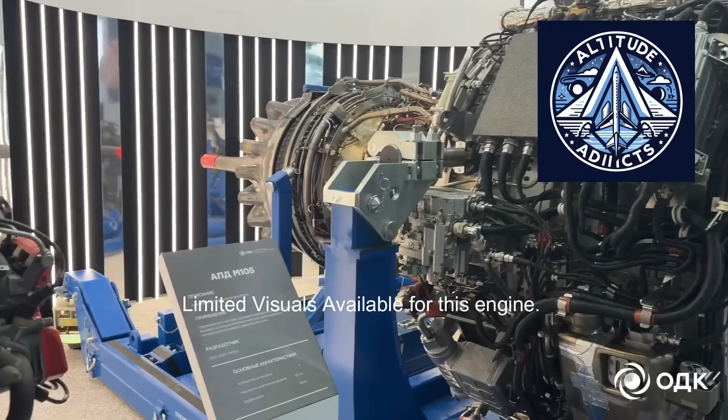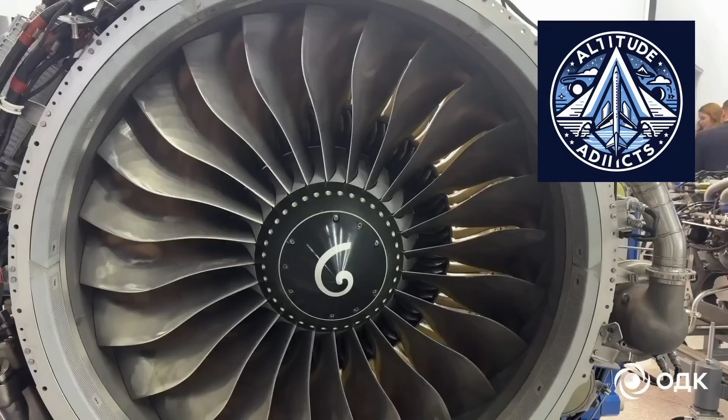The Russian engine building sector introduced a new piston aircraft engine in early 2026 that was specifically designed for light aviation. The APD M105 and M105V is rated at 115 horsepower, offers a declared service life of 2,000 flight hours, and weighs just 75 kilograms. On paper, this combination of modern power output, unusually high time between overhauls, and very low weight directly addresses operational challenges that Russian small aircraft designers have faced for years.

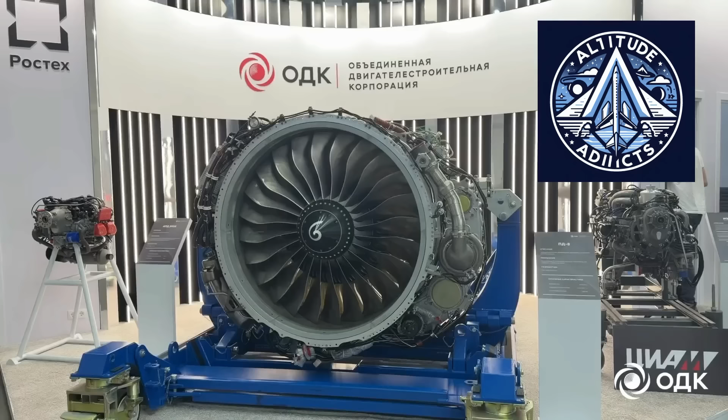As Altitude Addicts explains, the importance of M105 and M105V extends far beyond technical specifications because it enters a domestic market that has historically depended on imported piston engines. Until recently, Russia struggled to produce a competitive, mass-manufactured indigenous power plant for light aviation. This makes the new engine not only a technological breakthrough, but also a strategic commercial milestone. Altitude Addicts notes that it signals a renewed effort to rebuild domestic expertise in piston aircraft engines, an area that gradually lagged behind global competitors after the Soviet era.

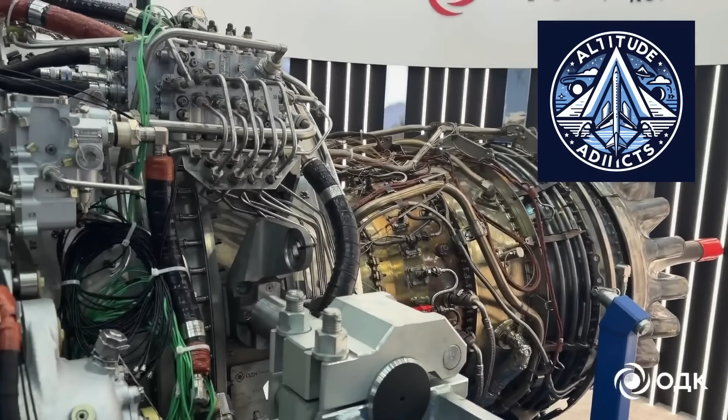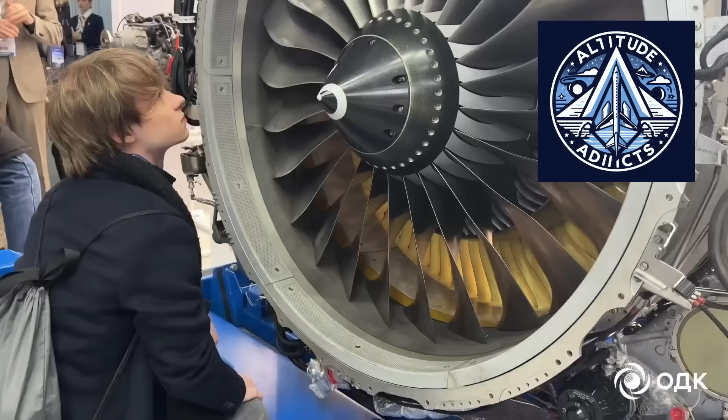To understand why this development matters, it is necessary to examine the long-standing reliance on foreign propulsion systems. For more than 30 years, foreign-made piston engines have dominated Russia's light aircraft segment, including training airplanes, ultralights, amphibians, gyrocopters, and certain unmanned platforms. Austrian Rotax engines became especially popular due to fuel efficiency, strong power-to-weight ratios, and proven reliability. Meanwhile, American engines produced by Continental and Lycoming were frequently used when older certified aircraft underwent remotorization.

This dependence created a structural vulnerability within the domestic aviation ecosystem. Spare parts availability, certification pathways, aircraft production timelines, and long-term maintenance planning were all closely tied to external suppliers. As geopolitical tensions increased and supply chains became less predictable, the risks of relying on imported propulsion systems grew more visible. Altitude Addicts has repeatedly highlighted the absence of a modern, scalable piston engine suitable for widespread light aviation use.

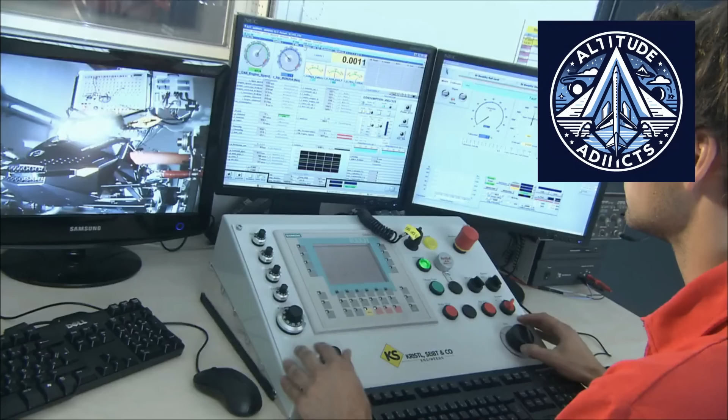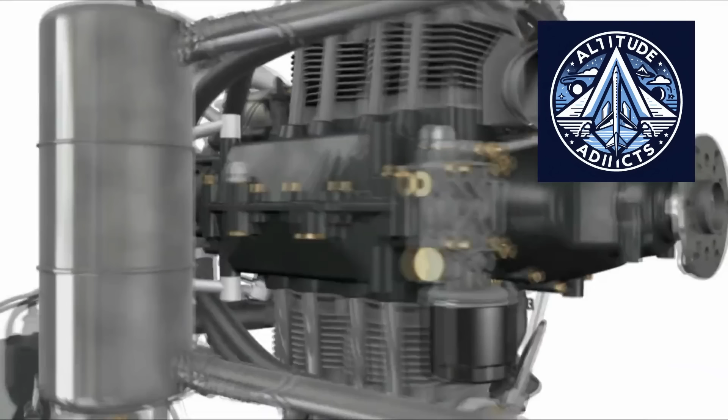Over the years, various experimental designs appeared, including rotary prototypes and automotive engine adaptations. However, very few achieved fully supported serial production with competitive weight and service life. Against this backdrop, M105 and M105V stands out because it directly addresses this persistent gap. It gives airframe designers the option to specify a locally produced engine, reducing exposure to supply disruptions while strengthening the domestic industrial base. Looking at its intended market position helps clarify which engines it may replace.

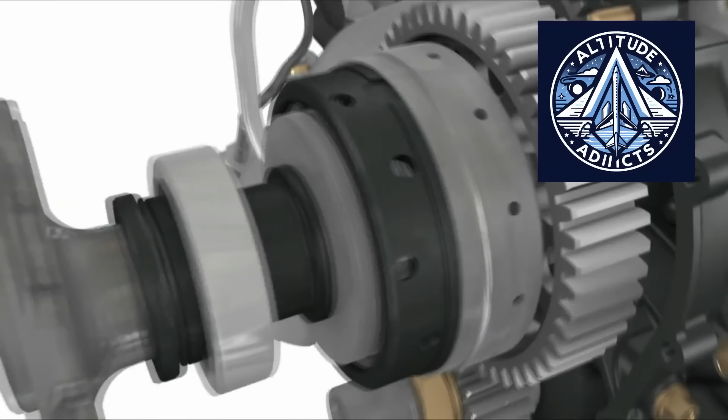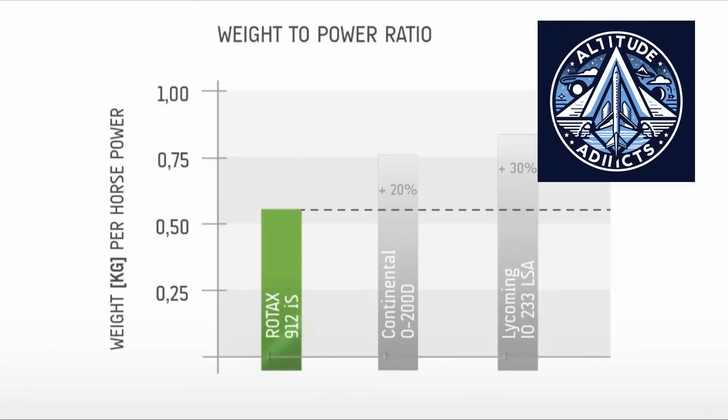With its technical profile, the engine fits squarely within the globally popular 100 to 120 horsepower category. Among the most recognized engines in this class are the Rotax 912 and 914 series, widely considered the international benchmark for light sport aircraft and two-seat trainers. Russian aircraft designs have relied on these motors for decades because of their consistent reliability and efficient fuel burn. For developers pursuing technological autonomy, replacing Rotax-class engines has therefore become a priority.

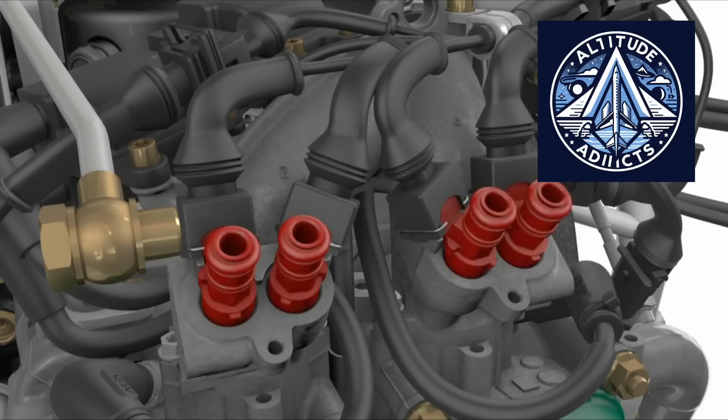The M105 and M105V appears purpose-built to occupy this segment. Delivering 115 horsepower along with a long service life, it could become a direct substitute for many aircraft that historically depended on imported engines if operational reliability meets expectations. Altitude Addicts views this positioning as one of the engine's most strategically important attributes.

Beyond Rotax, the engine may also provide an alternative for certain applications traditionally powered by Lycoming and Continental units. Although those engines often serve heavier certified aircraft, the presence of a domestic option carries clear long-term strategic value. As certification expands and integration experience grows, locally produced engines could increasingly support remotorization of legacy airframes.

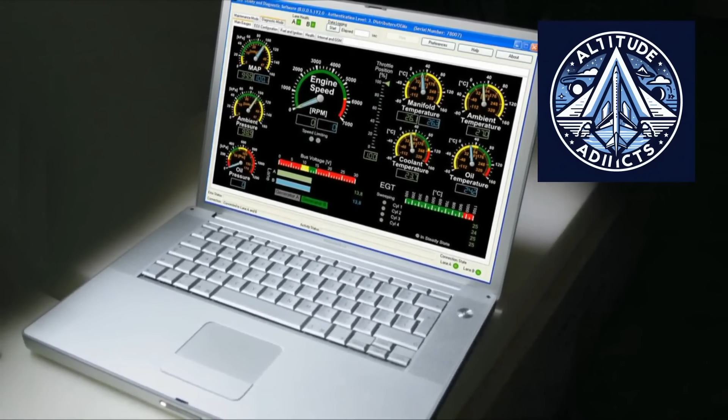Examining the specifications reveals how power, weight, and durability shape the engine's role in aviation. Generating 115 horsepower, it is well suited for pilot training aircraft, recreational flying, aerial observation, and short regional transport. This output provides sufficient thrust for safe departures while maintaining economical cruise performance.

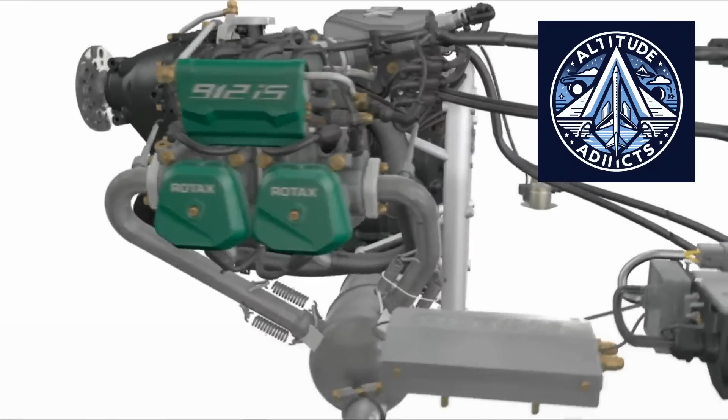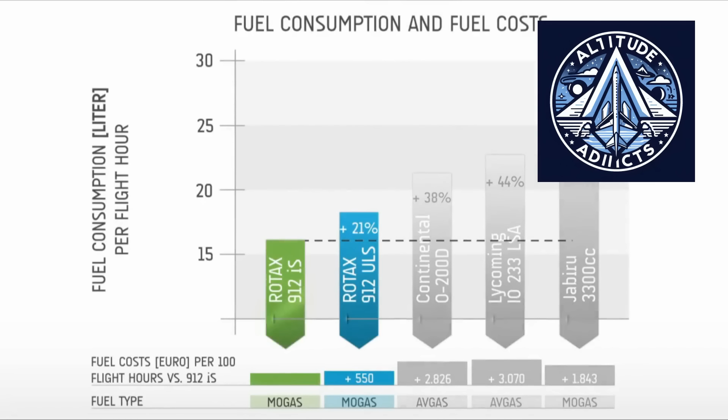Perhaps even more significant is the declared service life of 2,000 hours. Longevity strongly influences operating costs in the piston engine category. Engines requiring frequent overhauls increase downtime and financial pressure for flight schools and commercial operators. A longer time between overhauls therefore improves fleet availability and lowers life cycle expenses. The engine's weight of just 75 kilograms is equally impactful. In light aviation, every kilogram saved can enhance climb performance, extend range, or allow additional payload.

Reducing engine mass also simplifies aircraft design by giving engineers greater flexibility when balancing aerodynamics and structural requirements. Another notable characteristic is its intended versatility. Designed to support installation on airplanes, helicopters, gyrocopters, and experimental platforms, the engine appears to function as a modular solution capable of serving multiple aviation niches.

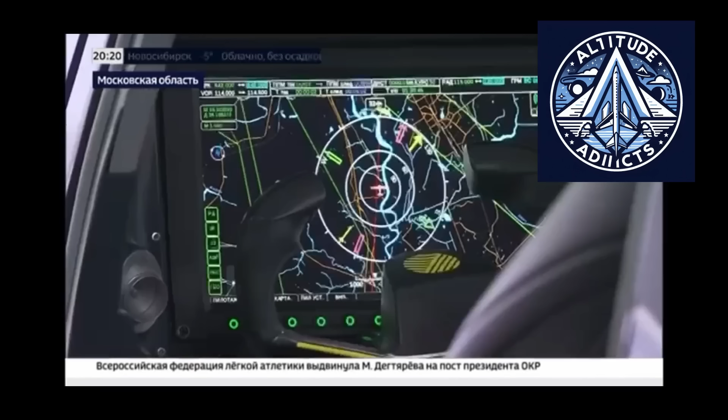Considering potential applications reveals just how broad its impact could be. Two-seat trainers and light sport aircraft are among the most likely candidates, forming the backbone of pilot training worldwide. A domestic engine with competitive specifications could reduce manufacturing costs and make aircraft ownership more accessible for private pilots and aero clubs. Amphibious light aircraft represent another promising use case.

These aircraft often operate in remote regions with limited maintenance infrastructure. An engine combining long service life with a simplified support chain could significantly improve operational sustainability in such environments. Autogyros and gyrocopters also fall comfortably within the engine's performance envelope. Because favorable power-to-weight ratios strongly influence their flight characteristics, reducing engine mass can directly enhance performance.

Light helicopters may benefit as well. A compact 115 horsepower engine could broaden design possibilities for single-seat and two-seat rotorcraft, potentially increasing endurance or useful load while meeting strict reliability requirements. Experimental and kit aircraft builders could become early adopters. This community often embraces emerging propulsion technologies, particularly when they promise improved efficiency or simplified maintenance.

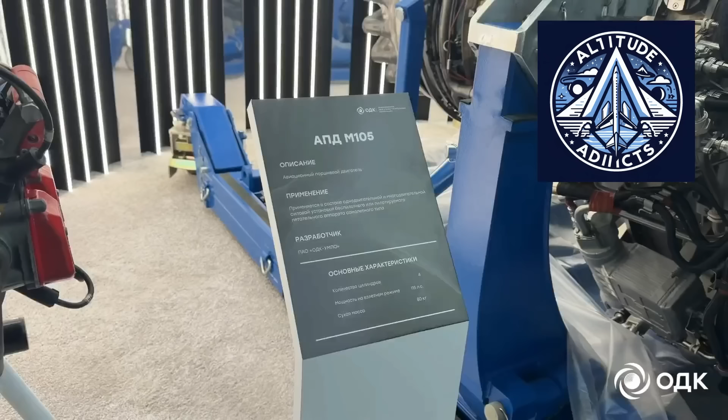Looking beyond individual aircraft programs reveals the broader strategic significance. A domestic piston engine strengthens national manufacturing capability, supports local supply chains, and fosters expertise in advanced materials, machining, and control systems. For policymakers and industry planners, these developments enhance technological resilience by allowing aviation programs to progress with greater predictability. A successful platform could also generate export opportunities, particularly in regions seeking cost-effective alternatives to Western propulsion systems. If expanded into a broader engine family, M105 and M105V could anchor a revitalized domestic light aviation offering.

In conclusion, the M105 and M105V piston aircraft engine marks a pivotal moment for Russia's light aviation sector. For decades, the absence of a competitive domestic engine forced manufacturers and operators to depend heavily on foreign suppliers, especially within the crucial 100 to 120 horsepower range. By delivering comparable power, a 2,000-hour service life, and exceptionally low weight, the new engine presents a credible pathway toward replacing imported propulsion systems across trainers, amphibians, gyrocopters, light helicopters, experimental aircraft, and certain unmanned platforms.

Its ultimate success will depend on certification progress, testing outcomes, and the creation of a dependable support network. Even at this early stage, however, Altitude Addicts observes that the program reflects a renewed commitment to restoring domestic capability in light aircraft engines. If momentum continues, the engine could power a new generation of aircraft while helping re-establish technological independence in a segment of aviation that has long relied on the rest of the world.